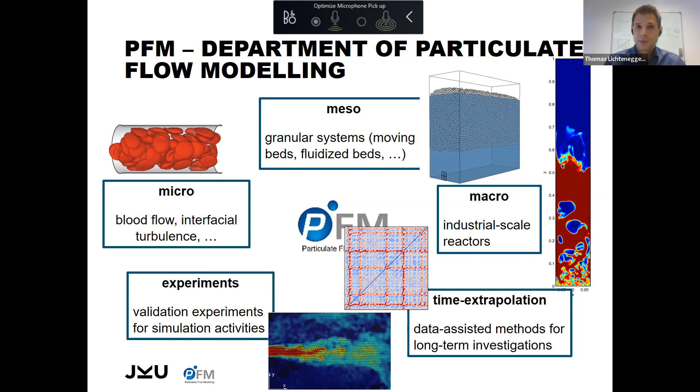And finally, this has become more and more important for us over the last few years. We use so-called time extrapolation techniques, where you basically try to generate short high fidelity time series and then make educated guesses about the long-term behavior of a system. This is also what this talk today will be about. I will start with the discussion of the limitations we face when we want to carry out numerical simulations for fluid mechanical problems. This more or less motivates this idea of Recurrence CFD.

At this point, I'd like to say a few words of caution. I have, of course, looked at the previous talks in this seminar, which all dealt with very high-level sophisticated machine learning techniques. So if you're expecting the same from this presentation, you will be disappointed. Our method is very simple. It's deliberately constructed that way because this comes with certain advantages, but you will not see any nice deep neural networks or stuff like that. So don't expect to see them.

Anyway, we will then proceed to the physical properties of recurrent flows. These are the target systems of our method. And I will show you several application cases. Of course, in the end, we will have conclusions, discuss limitations, and also possible future work.

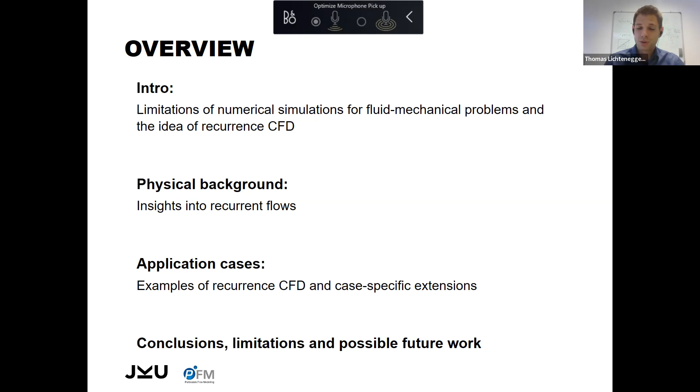This slide here is probably a no-brainer for this audience. I don't have to tell you that numerical simulations are important and very useful. They're often called the third pillar of science, where we have theoretical considerations and experiments being the classical two pillars. Basically, if we take the equations governing a system based on theoretical considerations and transform them into numerical code, and we validate this code against experimental findings, which is of course very important to know that it does what it is supposed to do, then we have created a numerical experiment inside of our computer.

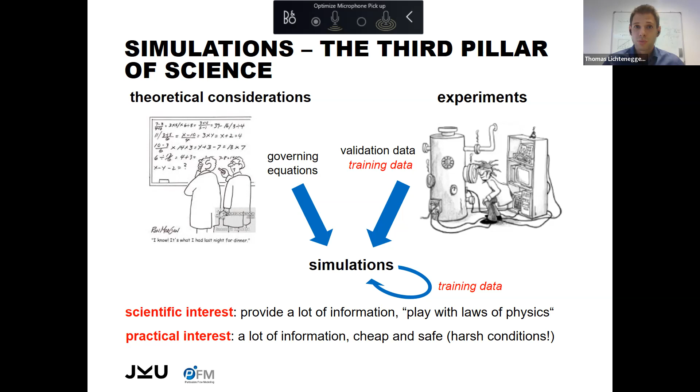This is where the usefulness comes from, because we can now just observe something that approximates reality within our computer. We can get a lot of information. We can even play around with the laws of physics. And this, of course, helps to understand various processes. Over the last several years, data have become more and more important, not only for validation purposes, but also for training purposes. They can come either from measurements or from simulations themselves. And we can, of course, use these data to generate better, improved simulations, data-assisted simulations.

So I would say, quite independent of the specific problem at hand, one of the greatest challenges that we can face when we carry out numerical simulations are so-called multi-scale problems. In fluid mechanics, one of the most famous examples, I would say, are particulate flows. This means we have solid particles, they interact with each other, they can collide, and they, of course, interact with the surrounding fluid. This could be some gas or some liquid.

When we want to describe such a system, we can write down the equations of motion. This is not a big deal, but if we want to solve them, and we have to do this, of course, numerically, we are bound to relatively small particle numbers. So typically, particles are in the range of millimeters or below, but we might want to understand the behavior of an industrial-sized reactor with extensions of tens of meters. This means we have huge numbers of particles and we cannot solve the equations anymore, at least not in reasonable time.

And what is more, the characteristic timescale of such systems can be very, very short. For example, the collision duration of solid particles lies usually in the range of microseconds. So if you want to simulate the behavior, you of course have to resolve these short-term processes, but at the same time, this prevents you from going to long durations, like anything that is governed by slow degrees of freedom. So you might want to study a type of chemical conversion that takes place only very, very slowly, but you are bound to these short time steps. And this is, of course, a big problem.

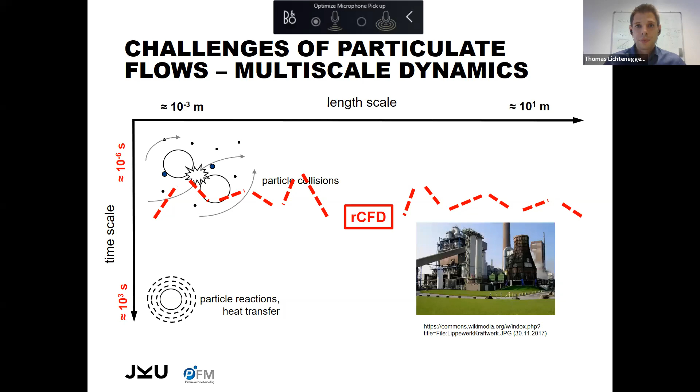So in fluid mechanics, we can usually simulate the behavior of non-trivial flows for a few seconds or at most minutes. But if we would like to go for hours, and this can be necessary in certain circumstances, this is almost impossible. And this is exactly where this new methodology, Recurrence CFD, is located; it tries to go beyond this limitation of timescales.

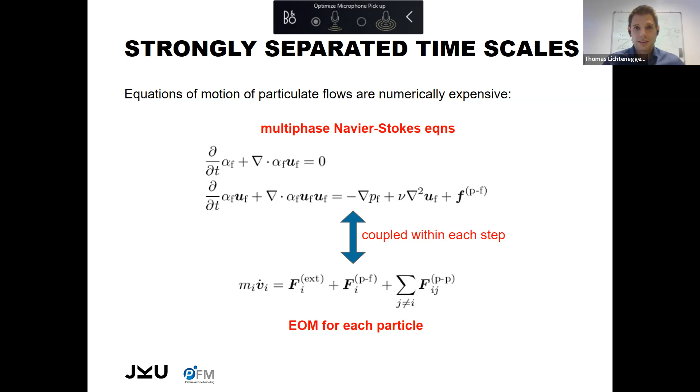Now, let's have a closer look. Let's be a bit more specific. Why is this a problem? For a particulate flow, we on the one hand have the fluid problem. This means we need to solve the Navier-Stokes equations, in this case in multiphase formulation. And for each single particle which we want to describe, we need to solve its equation of motion, which is just Newton's second law, but nevertheless we end up with a huge system of ordinary differential equations coupled to the partial differential equations of the fluid problem. All of them have to be solved at the same time, so you can imagine this is numerically very, very tough, and easily the costs accumulate beyond what is reasonable.

So in short words, we have a large number of degrees of freedom. This means a large number of particles and a large number of computational cells. We have to take very small time steps because we deal with highly dynamic systems and stiff materials, and this limits us to short observation times. As soon as we would like to investigate the long-term behavior of a dynamic process, we are more or less out of hope. So we indeed need a new methodology, and we need two aspects here.

First of all, whatever method should deal with such a problem needs to take into account the spread of timescales. We cannot just use a standard CFD code which completely ignores this problem. Then we are bound by these small time steps, and we can never go to long durations. And what is equally important, if we are interested in the long-term behavior of the flow, we clearly have to somehow take a large number of steps, but we need to prevent the accumulation of prediction errors. Or to put it differently, our method should somehow be resilient against such an accumulation.

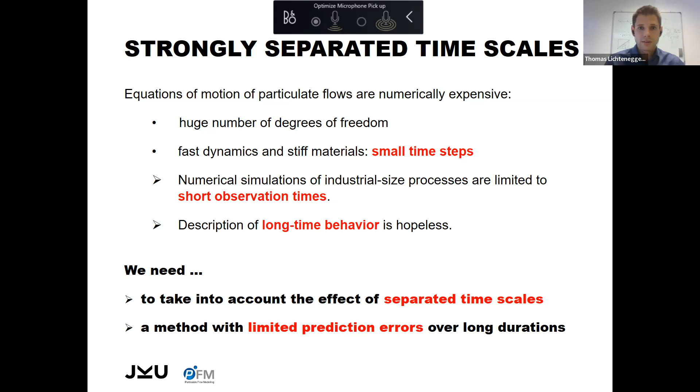And what these three examples have in common, if you study them over sufficiently long durations, you will encounter reappearing structures, so-called recurring patterns, characteristic configurations, or sometimes also called coherent structures, which appear again and again. And I'm not talking about periodicity here. This can be a completely irregular reappearance of patterns, but nevertheless, the same structures keep appearing. Of course, these structures can undergo some drift over time because system parameters might change slowly, but nevertheless, we can identify them. And this is important information we can have about the system. If we know that it repeats what it has already done, and we can somehow utilize this information, this will give us a huge advantage.

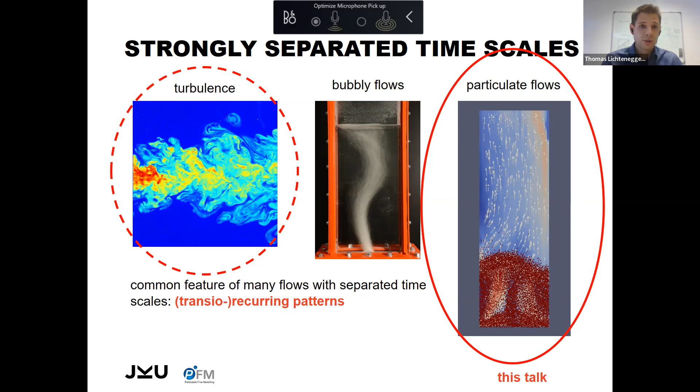Now, in this talk, I will mainly focus on particulate flows, but there will also be one short example about the turbulent flow. So I would say in our community, the most popular example for a particulate flow is a so-called fluidized bed. You now see an animation of such a case. So we have a box with solid particles, gas flows through from below, and it creates voids inside this particle bed. The voids rise, the bed erupts, particles get intermixed, and then the bed collapses again. And basically the same thing is happening again and again. This somehow looks like a bubbling fluid. For this reason, it's also called a bubbling fluidized bed.

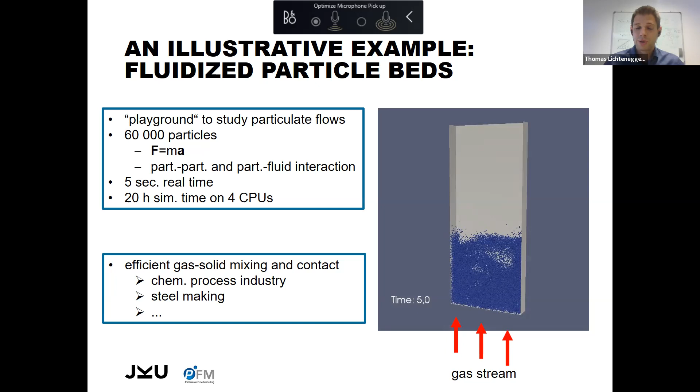On the one hand, this is a very nice test case to understand if you model the physics of the particle-fluid interaction correctly, but this is also important for various industrial cases because there are reactors that operate that way. Anyway, if you have watched this animation, you have probably gotten the feeling that this is very, very repetitive, right? The same thing happens again and again. If we look at these two snapshots of the particle concentration field, they're taken from completely different times. We see that these are very similar configurations. I'm not saying they're identical, but they're very close to each other, even though they are far away in time.

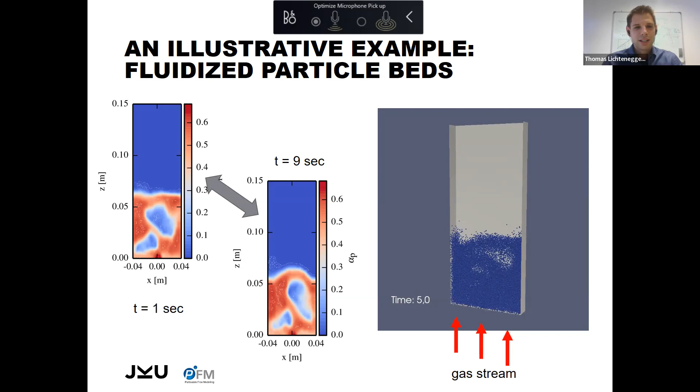Thomas, what do you mean similar? Because we need to define a norm. Is it in the naked eye norm, or is it in terms of statistics? Yes, that's a very good question. Because I just wanted to say our intuitive notion is of course not enough. We need to define some kind of distance function. This is what you see here. So I'm not sure if it's a bad message, but it's an important message: that there is no unique best choice. So you have to come up with some function which you think is reasonable.

For example, in the case of a multiphase flow, you might want to compare the volume fraction fields at two different times. You can take the difference and integrate the squared value. If you get a small value out of that, then you can say the flow fields are similar. If you get a very large number, they are dissimilar. But this is, of course, still up to a personal choice what distance function to use. But, well, we have to introduce something which we believe is reasonable. It turns out the final results are not very sensitive towards the choice as long as it's not completely crazy. But I completely agree, we should not just talk about our intuition, what looks similar or what does not.

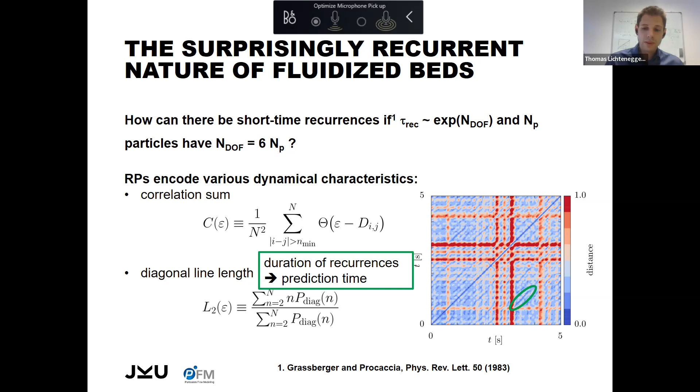So the puzzle of the short recurrence times was already solved with the correlation sum. One can show that this quantity has to follow a power law for very low thresholds. This means if we only look at the most similar states, there has to be a very specific shape of the correlation sum. And the exponent in this power law, this is the so-called correlation dimension of the system. You can imagine that the dynamics somehow takes place in a lower dimensional subspace of phase space, and this correlation dimension is more or less the dimension of this subspace where the dynamics really evolves.

Now, the important observation is that this correlation dimension, which somehow corresponds to the effective number of degrees of freedom, is much, much lower than the microscopic number of degrees of freedom. So I'm really talking about orders of magnitude here, and because this effective number of degrees of freedom, those which are active, is so low, the system actually does not have so many options how it could evolve.

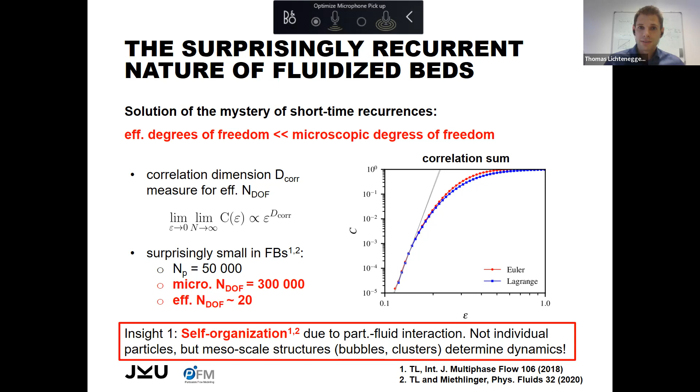So to interpret this in terms of physics, what we see here is a very strong self-organization of such systems. The particle-fluid interaction gives rise to the formation of mesoscopic structures. We have clusters of particles which move together. We have voids in between. So it's not the single particles which would be random walkers that create molecular chaos. We really have organized dynamics, which gives rise to a much more ordered motion with much shorter recurrence times. So this is the reason why we observe recurrent structures, because these systems tend to behave in a surprisingly ordered way.

Another nice observation we made concerns the prediction time of the system, because we saw it's orders of magnitude larger than the numerical time step used to generate this data. So this time step is, of course, somehow set by the numerical methods we are using. We want to get accurate results, then the simulations should run stable. This means we have to take small time steps. However, if we already have the data in terms of flow fields and we have 2 similar configurations, prediction times are orders of magnitude larger. And in this case, it's about 4 orders of magnitude.

And what is important here is spatially resolved information. If we would assess similarity only based on isolated probing points, we would end up with false nearest neighbors. So we would think that configurations are similar which would evolve in completely different directions. However, if we have the spatial information, so if we assess similarity over the whole domain, we do not get these false nearest neighbors. So we only have configurations that evolve in a similar way, and this allows us to make these large step predictions.

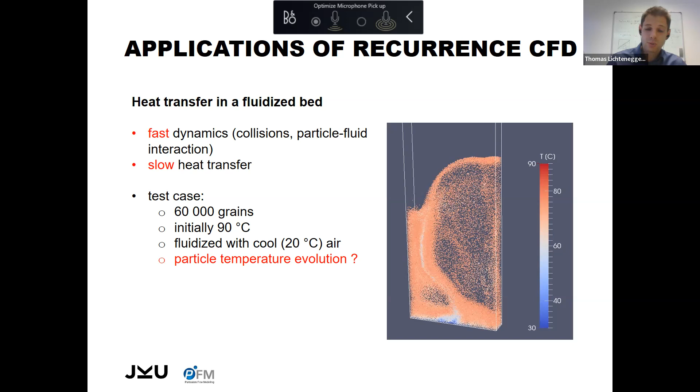Thomas, did you tell us how you do the CFD in the first place? Is it SPH? What kind of method do you use to generate this? This is so-called CFD-DEM, the discrete element method. Oh, discrete element method. Yeah, I know.

Okay, so it's basically similar to molecular dynamic simulations, but with solid macroscopic particles. Yeah, exactly. Okay, thank you. Yeah, so this is a standard method to describe particulate flows.

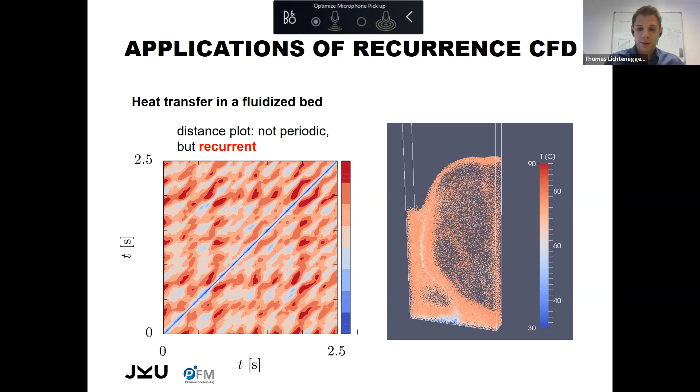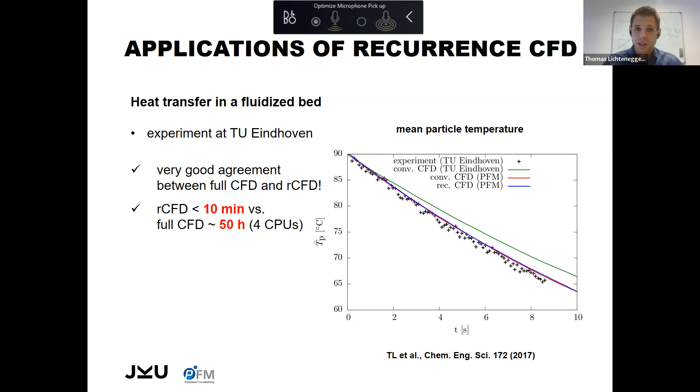But the main question was, of course, how would recurrence CFD perform? And it performed very well. So we basically did not find any discrepancy for the mean particle temperature. However, simulation times for these 10 seconds here went down from about 50 hours to below 10 minutes on the same hardware. So this is really nice. You just start your simulation, you go grab a cup of coffee, and once you return, you have your results.

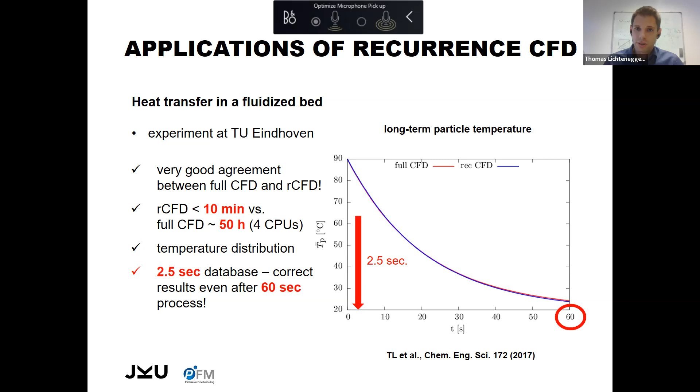So in the next step, we wanted to challenge the method. We kept on simulating for a full minute. At that time, the particle temperature had almost dropped to the ambient temperature of the fluidization gas. You can imagine getting the reference data here from the full CFD-DEM calculation was very time consuming, but we did not find any discrepancy. And let me stress, the time series we used, which we time extrapolated, consisted only of the first 2.5 seconds. So within these 2.5 seconds, the whole dynamics of the system was contained in such a way that we could picture heat transfer for basically arbitrary long durations. What this means, recurrent CFD can be seen as a, I would say, quite efficient way to extract information from short time series.

So of course, things get much more complicated if we have transient conditions. Boundary conditions might be time dependent. The slow long-term process might change the properties of the system, so heat transfer will lead to thermal expansion. And it's clear that we won't get away with one single database. So we need multiple databases corresponding to different parameters, and we then somehow have to combine the information between these databases. However, it's not at all clear how to do this.

So the interpolation of time series is, to my understanding, not a defined concept at all. You cannot just take two time series and get something in between. Then whatever we do, we want to get physically valid flow fields, and this should come at little numerical costs. Otherwise, we would lose any advantage we have gained. And these are, of course, quite heavy demands. And I have to admit, we have not found a really good solution yet. We have some solution which works to some extent, which I will explain now, but this is really crude.

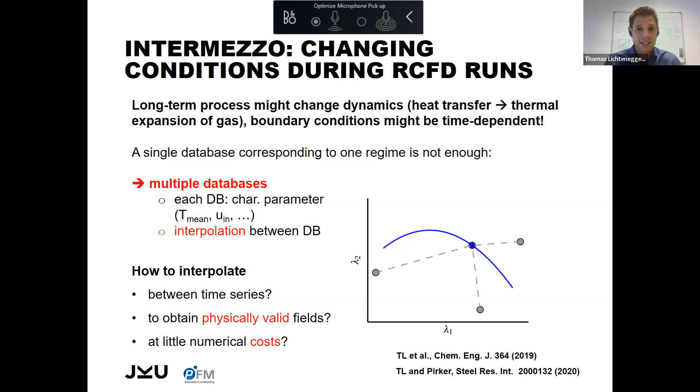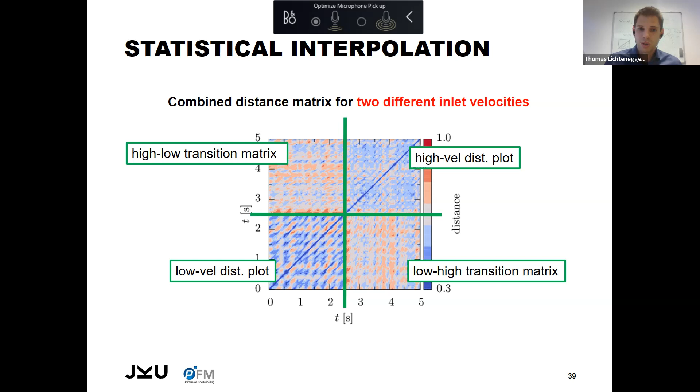Now, assume we have two time series for two distinct dynamic regimes, for example, a low velocity case and a high velocity case. And we can combine them into such a combined distance plot. So the lower left and the upper right quadrant are just the distance plots for each time series by themselves. And the off-diagonal blocks are the similarity matrices between the low and the high velocity case.

So what we can do is, or let me put it differently. We would like to picture the conditions somewhere in between these two extreme cases. And to somehow characterize this in-between condition, we may assign weights to the extreme databases. So if we want to picture something which is exactly in between, then we might have equal weights for both databases. Or we might want to picture conditions which are closer to one of the regimes. Then of course this weight would be larger.

Anyway, we start with our recurrence process as before. We take several consecutive steps. We go to a similar previous configuration and continue from there on. But at some point, we make a transition to the other database. So we continue from there on. We take several consecutive steps in the other database. And at some point, we will make our way back to the previous database.

The idea is to have intervals of consecutive flow fields where one interval is taken from one dynamic regime and the next interval might be taken from the other dynamic regime. And ideally, the total fraction of time spent in each of these databases would correspond to the previously defined weights. So on a temporal average, the resulting flow field might look more or less reasonable.

But of course, if I just look at instantaneous flow fields, it's either one from the low velocity or from the high velocity case. So I never have a correct state I'm using, but on average, hopefully these errors I'm making average out. The advantage is it's numerically equally cheap as the initial method. The downside is I'm always making some kind of prediction error. So let's have a look how this works.

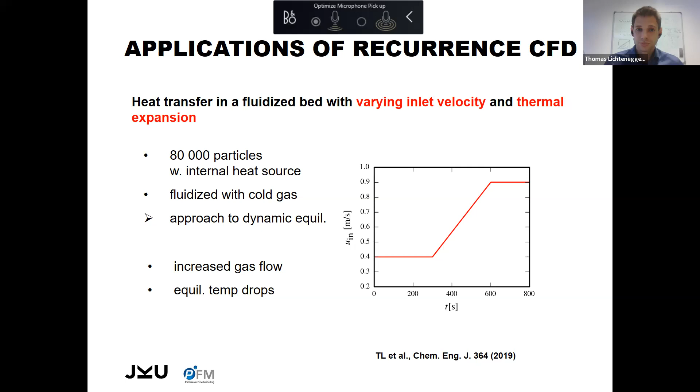Now, what was more of a surprise were the next 300 seconds where the inlet velocity linearly increased. So we jumped between the databases. First, most of the recurrence path was spent in the low velocity database, and only some additional fields were added from the high velocity database. But over time this changed, and we added more and more contributions from the high velocity database until the whole approximation took place in that one.

And it turns out for the mean particle temperature, this was completely okay. It's a crude approximation, but if we are only interested in this property, then the approximation was fine enough. For the last 200 seconds, again, no big surprise, a constant high inlet velocity, just one database was used. The results agreed very well. Now, only if we looked at the temperature distribution of the particles, or rather its width, we did find some discrepancy. And this is, of course, located in this transition region where the inlet velocity changed.

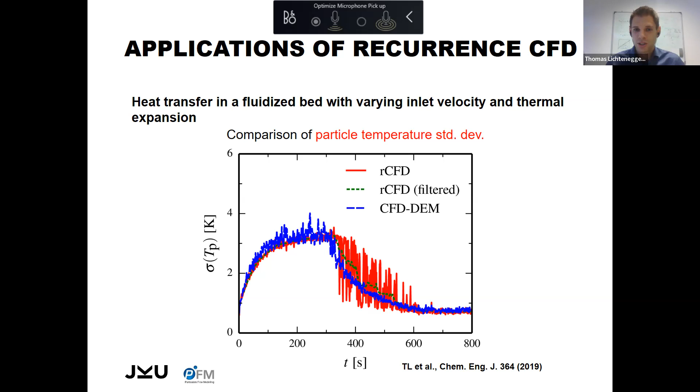If one knows how to interpret this result in a statistical sense, one can, of course, filter this curve. This gives then this green dashed curve, which is very close to the CFD-DEM result. But this is more or less proof that the method is a crude approximation when we try to picture intermediate conditions, and well, it only works somehow.

Now, the last example, and I won't go into so many details here because, well, time is limited, of course. Here we have a submerged jet under turbulent conditions. So liquid enters a box with high velocity, and this liquid carries bubbles. The liquid can exit the box through the bottom, and the bubbles will rise to the top through which they exit. What we would like to understand is, what does the long-term distribution of bubbles in the domain look like?

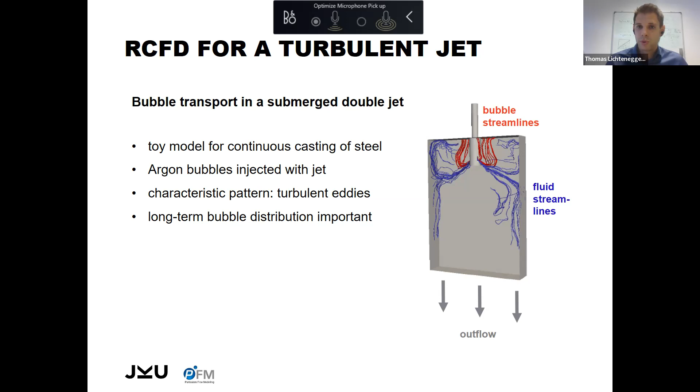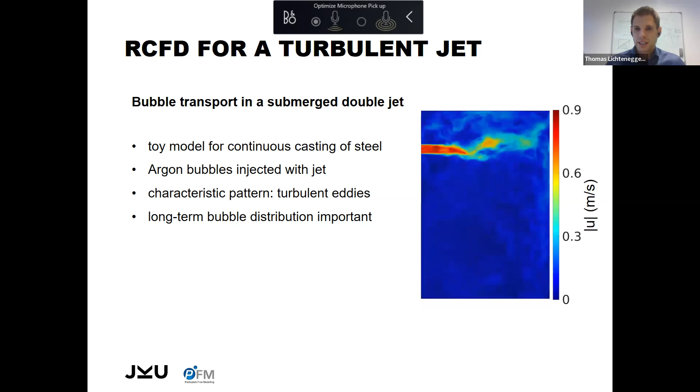How far into the box can these bubbles penetrate? Which is important, for example, in certain steel-making applications where liquid steel is treated that way with argon bubbles. If we look at an animation of this jet, we see that it's extremely unsteady. We have many fluctuations, and even though we can somehow identify larger scale recirculation areas, everything is very noisy, right?

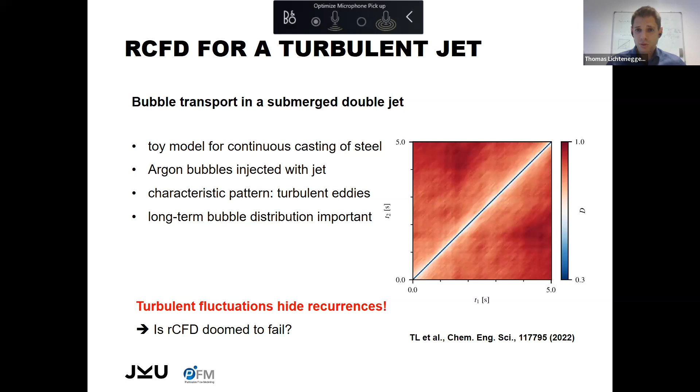And this reflects in the distance plot we have computed. We more or less do not see any off-diagonal structures. There is no similarity between states over the whole domain because there is so much noise. And well, this sounded like a very bad message for us. If we don't find similar states, how can we make predictions? So to our big surprise, if we just applied the methodology, the results were not that bad after all.

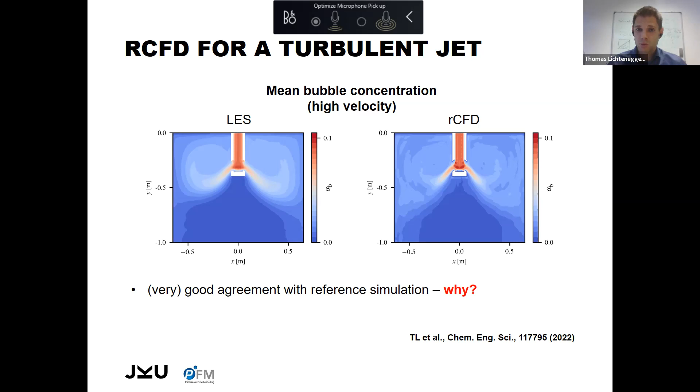On the left-hand side, we see here a large eddy simulation, the ground truth for our case. And on the right-hand side, we see the result of recurrence CFD for the time averaged bubble distribution in the domain. And we see there is not so much difference between these two results. If we go to higher velocities, of course, we find some differences, but the qualitative behavior, I would say, is very similar. So for this high velocity, some bubbles are entrained and move downwards, which we observe in both cases.

Also, if we look at the total number of bubbles in the domain, so-called bubble holdup, we have a very good agreement for both the low and the high inlet velocity case. In both cases, recurrence CFD and the large eddy result agree quite nicely. Now, why is this the case? It turns out this property that the statistical moments of the time extrapolated series are the same as those of the initial one, this persists. And if your long-term process you're interested in is not too sensitive against abrupt variations, then this can still work.

Because now, of course, we have very abrupt variations. We do not find similar configurations from which we can continue. So we have to continue from any previous configuration. We have strong variations. And if you are interested, let's say, in a diffusion-driven process, this might be a problem. But in this case, just for simple bubble transport, it turned out that, well, the method even worked without the identification of really similar states.

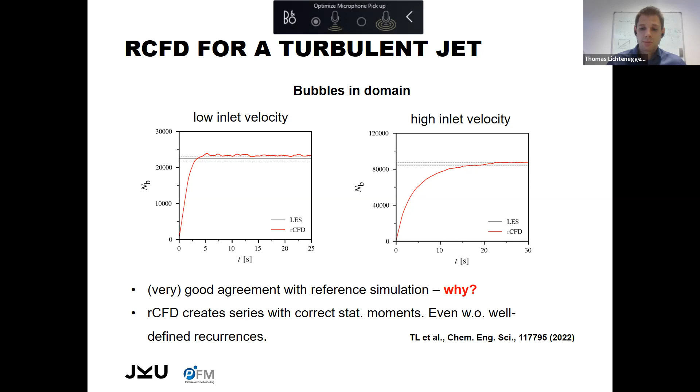So I'm now skipping this slide because I'd also like to spend some time on the concluding remarks. I'm also skipping the discussion of related work. I'd just like to mention several people have contributed to this methodology. In the beginning, it was only our group, but by now a few other groups are also picking up the method, which is of course nice to see when others start using your work. But still our group is the main host of the method.

Anyway, the main conclusion I would say is that we can often observe recurrent structures in driven dissipative systems if we study them over sufficiently long durations. And this is important information we can have because we can now make large step predictions based on similarity. So we need the data, we need the spatially resolved data, but once we have it and we can identify similar structures, we may use this observation and make predictions with very large time steps.

So of course, this does not tell you anything new about the dynamics of the system. You only have the information contained within your short initial time series, and you cannot generate new information out of that, but you can generate a long-term background, a dynamic background on which you may study long-term processes. So this is where the method is useful if there is such a long-term process which you would like to study and which really depends on how the dynamic background looks like. You can use any conventional numerical technique of your liking to study this long-term process and, well, save a lot of computational time.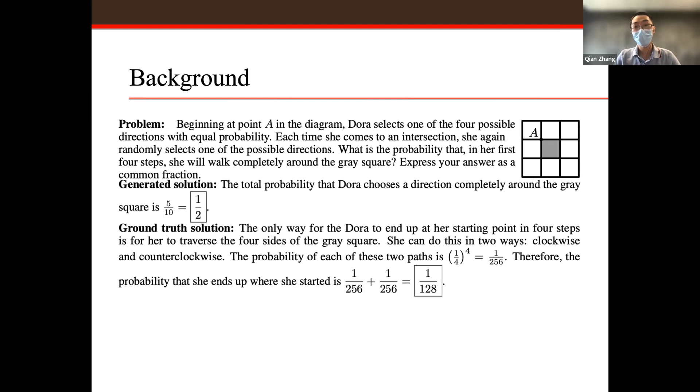So this is why the Google guys are trying to develop such a language model, trained to deal with the problem in a very reasoning way, that is step by step via logic inference. And now they created something called Minerva, the wisdom goddess in the Roman tales, and of course they hope it will be as clever as the goddess, so that's why they name it.

The model detail is: first, it is based on the very recent language model called PaLM, Pathways Language Model, also developed by Google. There are 3 versions actually, 8 billion, 62 billion, and 540 billion parameters for each model. Just notice the unit, it's billion. And they are trained with V4 TPU on Google Cloud. For each of the 3 versions, they use 14 days, 17 days, and the longest, of course the most expensive one, is almost a month.

And also they are using a tremendously large training data set. That is, they're using 1.2 million arXiv papers, totaling 58 GB of data. Just imagine 1.2 million arXiv papers. I guess nobody here can read so many papers in life. And of course, they also use approximately 60 gigabytes of mathematical web pages, just imagine Math Stack Exchange or something like that.